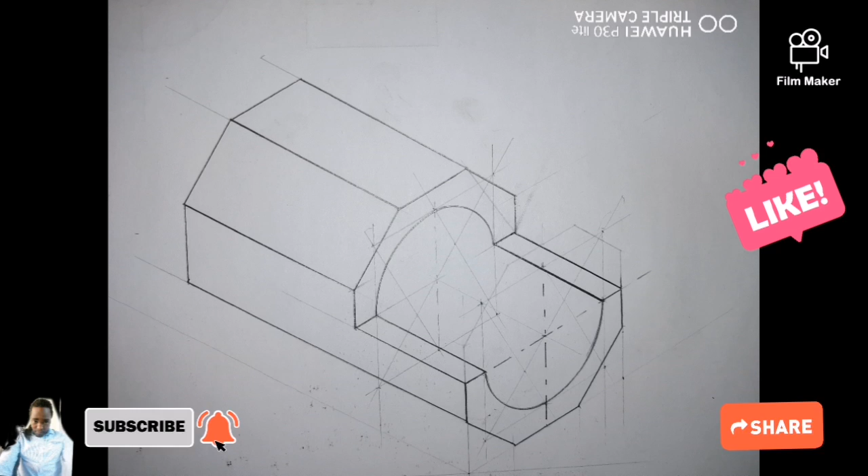Right, ladies and gentlemen, let's look at what we have now here. Isometric N2. So these two primary views are given in third angle orthographic projection, which means this one is your front view, this one is your right view.

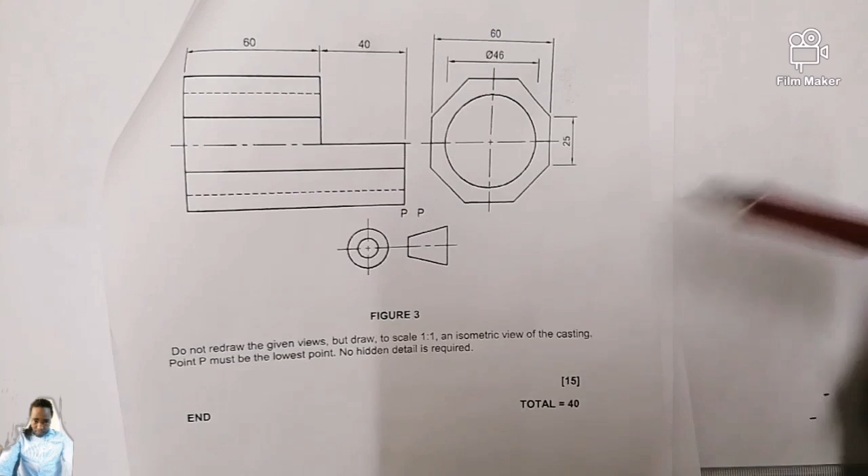Actually, they were supposed to be given in first angle orthographic projection, so that it will be well exposed. Even these hidden details, they were gonna be well exposed. You are going to see it clearly. But then let's answer the question according to the way as it is given. So we are not going to create our own question, you understand?

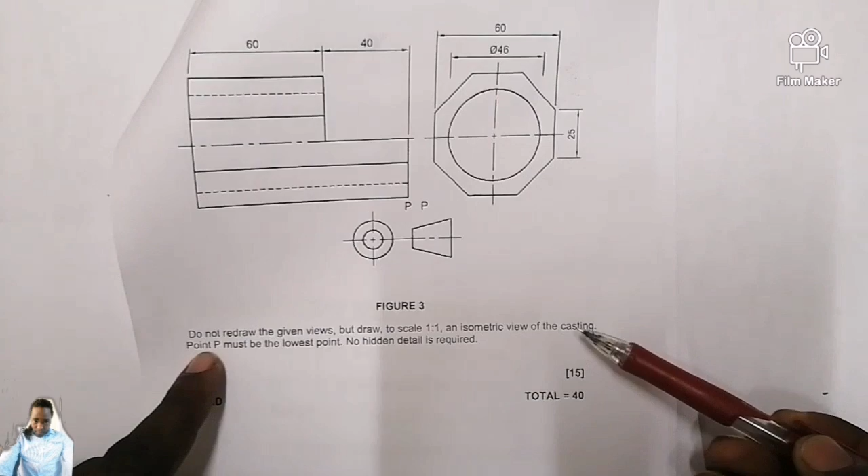So do not redraw the given views, but draw to a scale 1:1 an isometric view of this casting. Point P must be the lowest point, no hidden details is required. So let us start. So you remember that it is advisable to start bottom, a little bit center of your drawing sheet, because what you're about to draw, it will be going up.

So I'll start with a line out of dimension. This line from here till here, it's a center line, it's a faint line out of dimension. From there I will draw a perpendicular against it, you understand? So this point, I'll give it a name as point P, which is this P that they are talking about. So from there at point P, remember we use this set square, isn't it? 30-60 degrees anti-clock and clock.

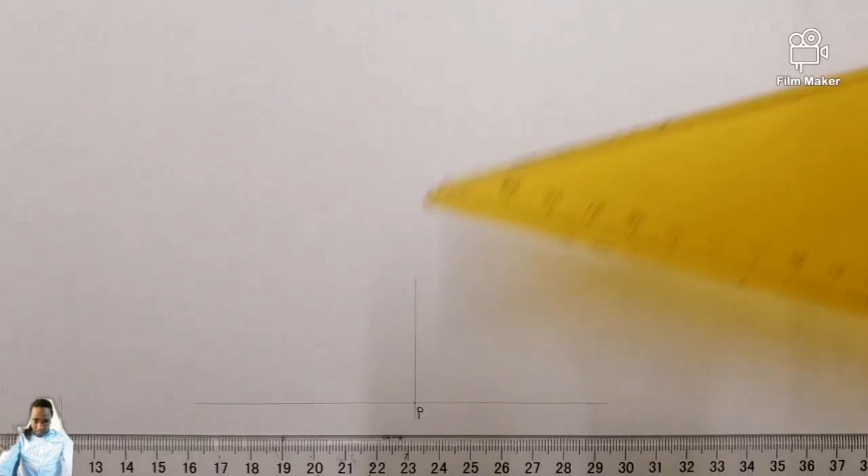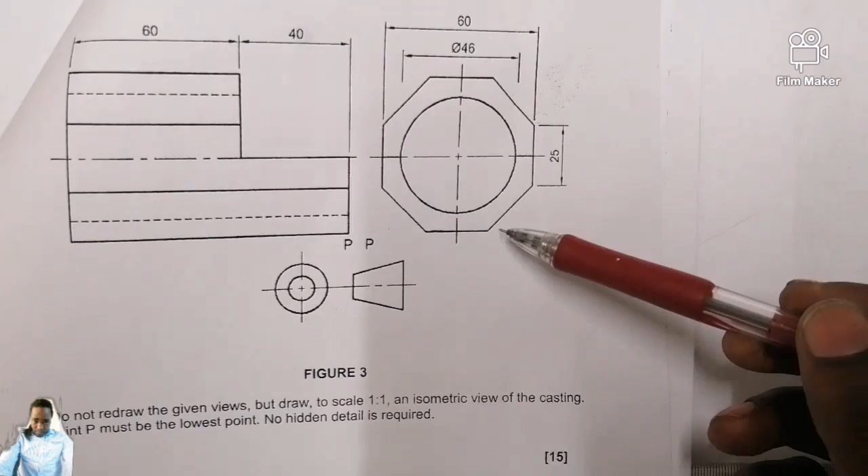So from point P, I am going to have a faint line at an angle of 30 anti-clockwise like this, and twist it this side again like this. Then from there I will firstly draw this hexagon. 1, 2, it's octagon, it's not hex, because hex means 6. So 1, 2, 3, 4, 5, 6, 7, 8 is an octagon. So I will firstly draw it aside so that I take proper dimension, you understand?

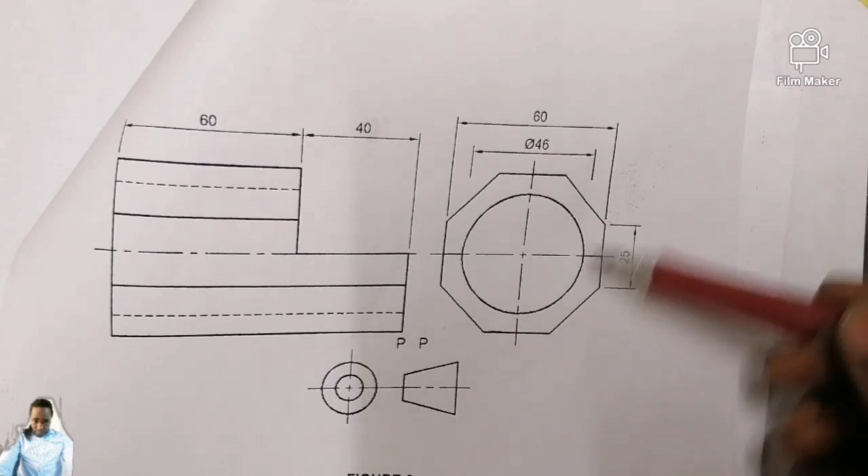So somewhere up right hand corner of my drawing sheet, I will draw this faint line out of dimension, isn't it? Then we are told that this octagon of ours is supposed to be 60 millimeter, and we're even given the diameter of it. So from here till here is 25 millimeter. So what do you do with that? So from this point, I'll put this angle out of dimension. Then I measure 25 millimeter. There is my 25. So I can erase here.

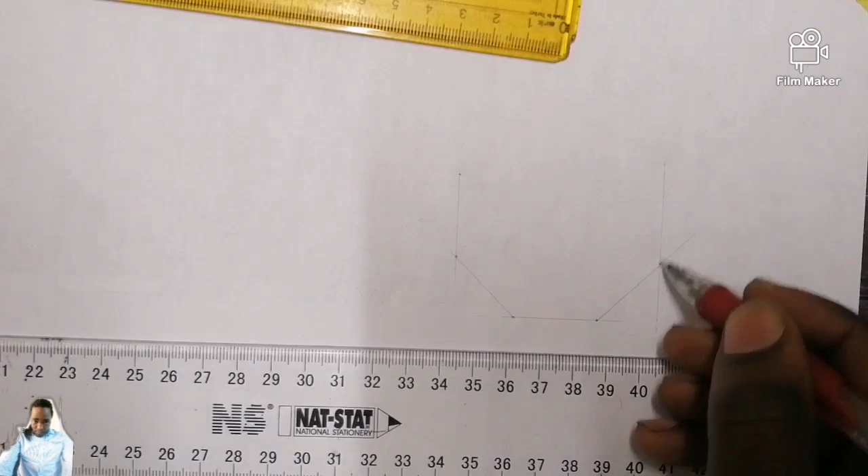And again from here till here, we know the properties of an octagon. All the sides, they must be equal. So there is my 25 millimeter. So which means I can erase here again. There you go. So we know this point and that one, they must be on the same horizontal line. So I can easily put my T-square like this. So from here till here is 25 millimeter. So I can now go up and again up, you understand? Then I measure my 25 millimeter again. There it is. So again from here going up your 25 millimeter again. There it is.

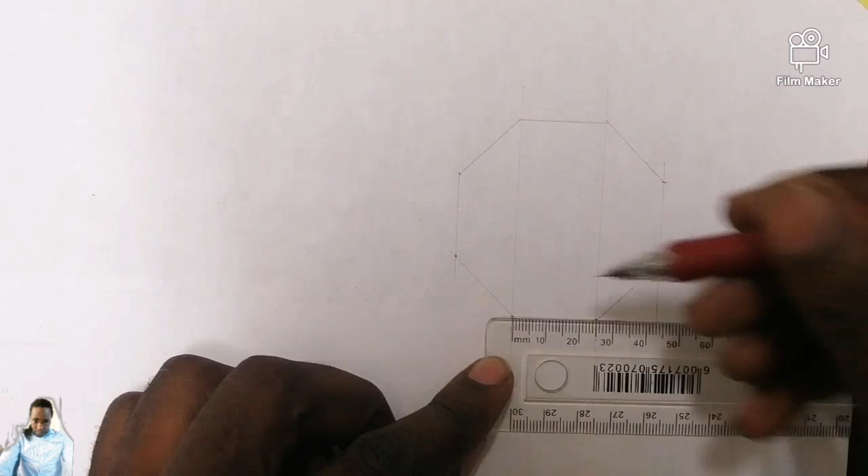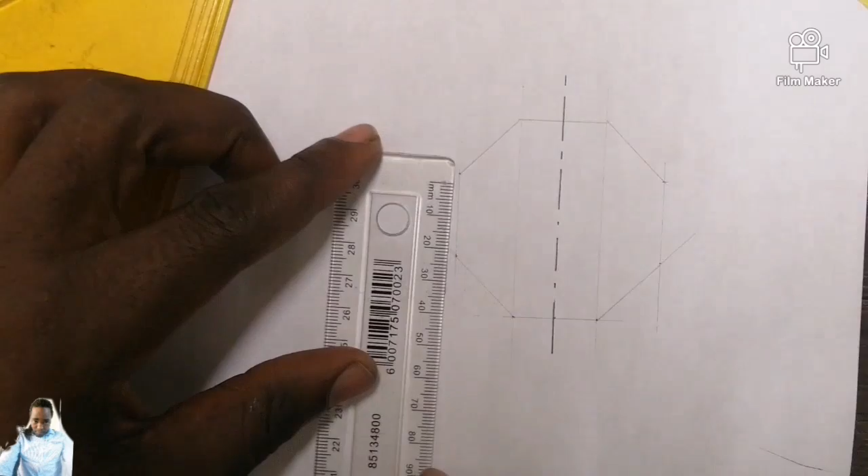Then after that, I'll take this one up, faint and faint, so that I have this one. There you go, and here you go. Gotten your octagon. You understand? So we've gotten our octagon. So let's get the center of it. So from here till here is 25, isn't it? So 25 divided by 2, it is 12.5. So 10, 11, 12.5 is between 12 and 13. You understand? So I'll have the center, then again this side, ten, 11, 12.5, between 12 millimeter and 13 millimeter. I can have my horizontal center line. So it is absolutely correct.

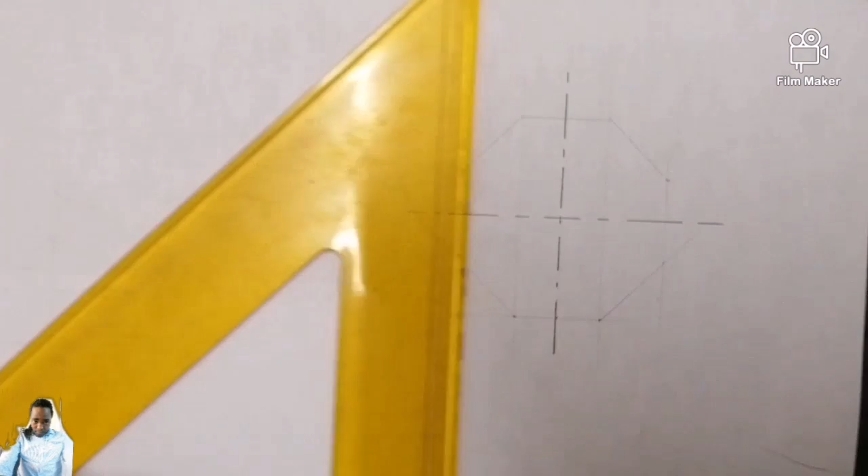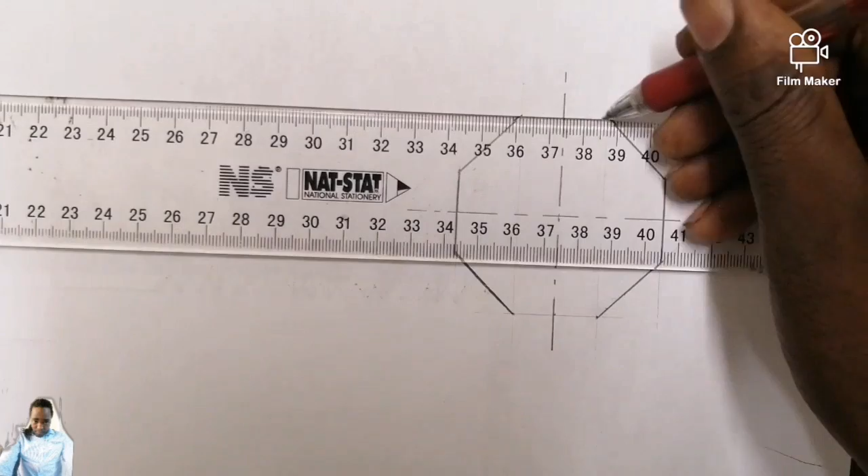You see that they told you from here till there is 60 millimeter. So let's confirm that there is your 60 millimeter, isn't it? There it's absolutely correct. So you can have it solid. Draw it solid now. This one is parallel to this one. This one parallel to this one. So that was the simplest method of drawing an octagon. The properties of the octagon, all the sides they must be equal and they must be at an angle of 45 degrees. Then from there till here, from there till here.

Right, so now we can go back to our P point. Take your drawing compass, put it from here till there, which is a half of 60, isn't it? It's 30. So I come and measure the 30 this side, because this is the right view. So I must have this side there is my 30 and 60 is right there. So where I have this one, I can put the vertical center line. There it is, just a little bit long. Then this one.

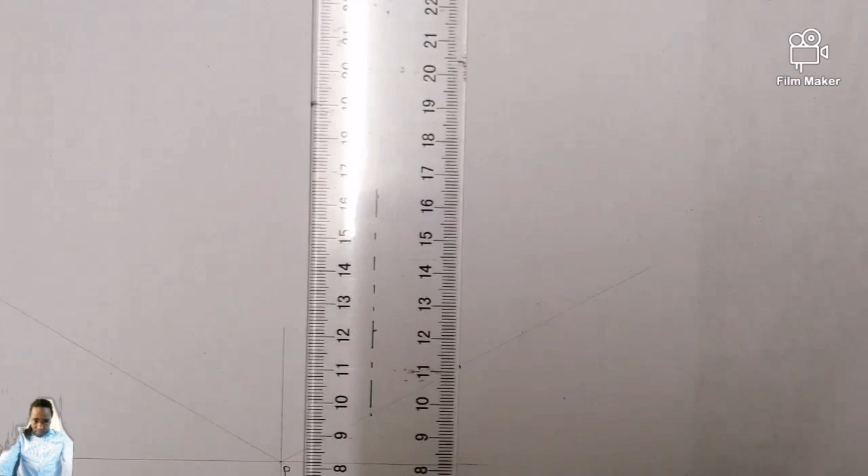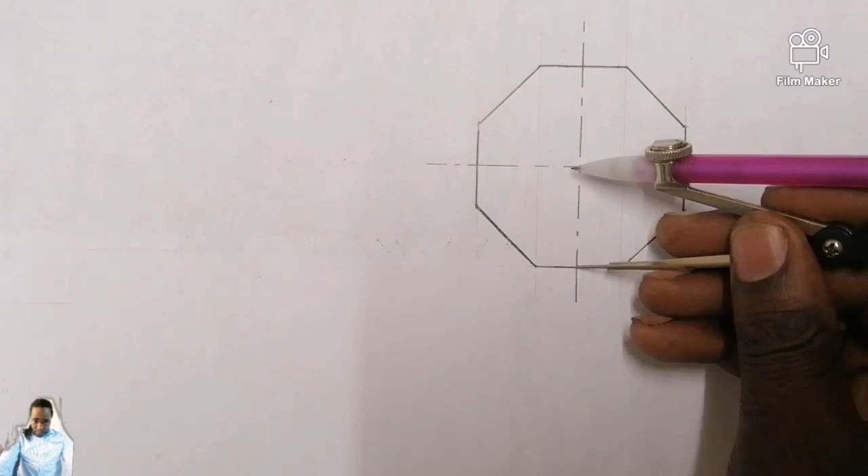So now let's see the height. Do we have the height? We do not have. That is why we had to draw the auxiliary of it. We had to draw this one. So place a drawing compass from here till the center. Actually, even if you place it from here to the center, it's still the same thing from here till there, or from here till here. Then after that, I come and place it here and give it a mark right there.

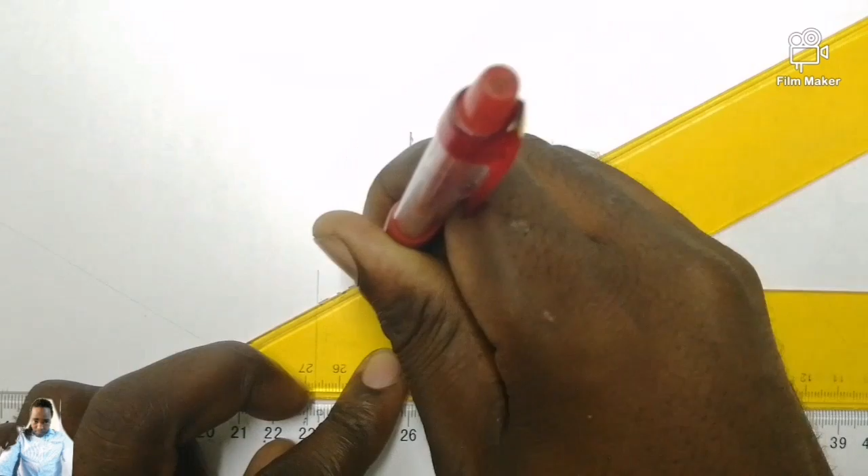So this one is going to give me the horizontal center line that is at an angle of 30 degrees, anti-clockwise, like this. Then after that, we are taking the dimension from your auxiliary. So I'll place my drawing compass here at the center till here, at this point. Accurate, this is it. Now I place it here at this point. I mark here and I mark there.

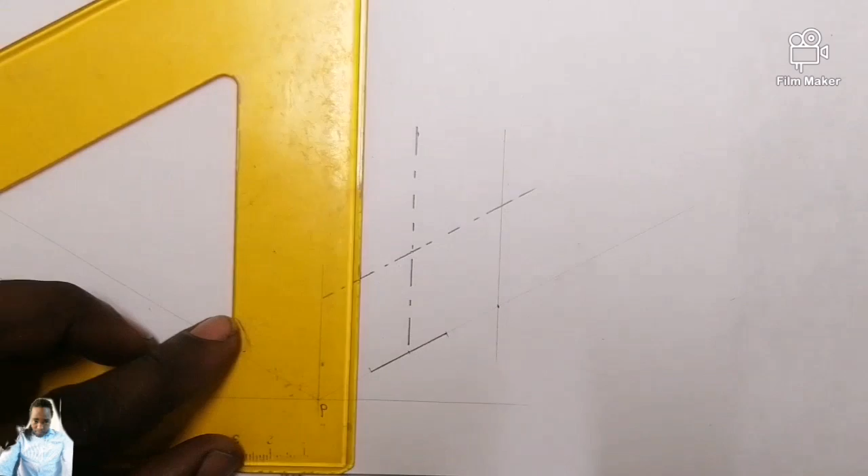You understand? So now I will have this one solid from here till right here. You understand? So now I can project these points up, faint, up and up. So what I did here, I can also do it there. So I mark here and I mark there, I mark here and I mark there.

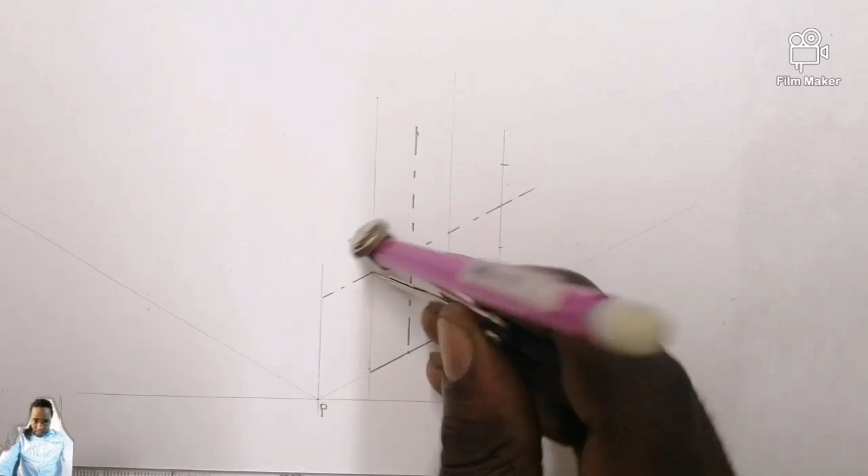Even if you just mark it once, because you just do like this, isn't it? They're supposed to be on the same line, but what you did here is supposed to be actually at this. So I'll further extend it just a little bit. Then from there it is supposed to be actually here and there, not on this one. Erase it. So now, without fear or favor, I can have this one solid from here till there. I can draw it solid now, and again this side from here till there I can draw it dark.

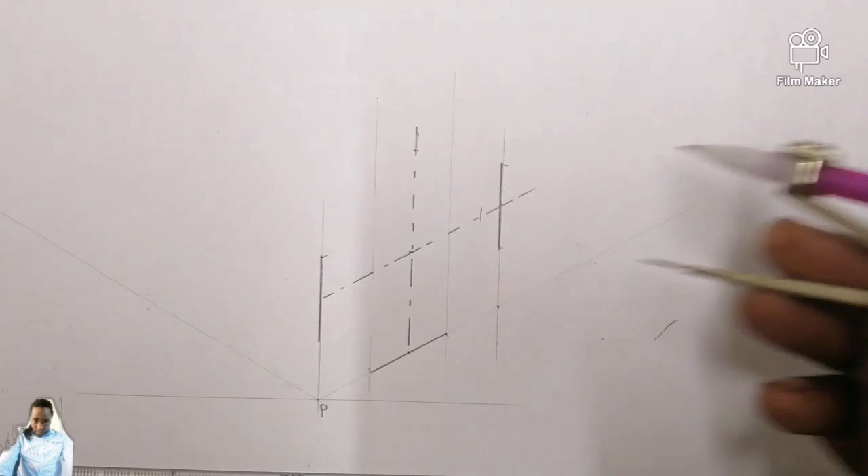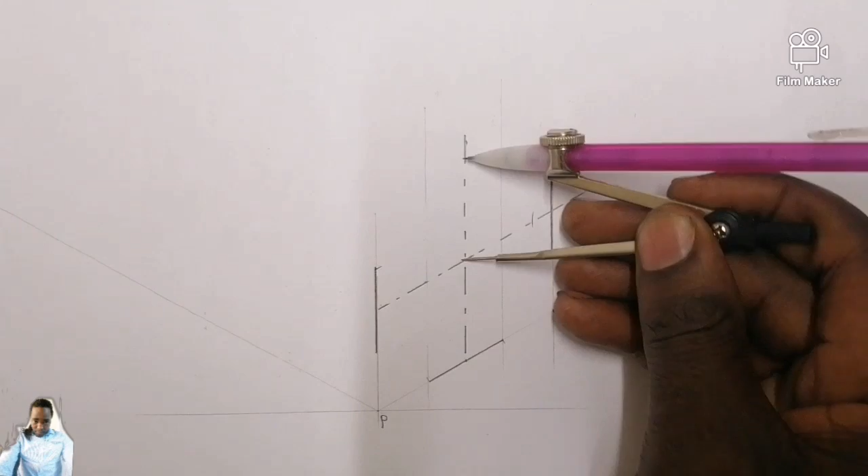You understand? So now let's get the height. This distance from here to your center is supposed to be the same, since here at your auxiliary, from here till there is the same as from here till there. You understand? So even here, from here till there, it's supposed to be the same. So now I'll have it solid at an angle of 30 anti-clockwise. There you go, dark like this. See? Then you can take your 30cm ruler and join this point with that one.

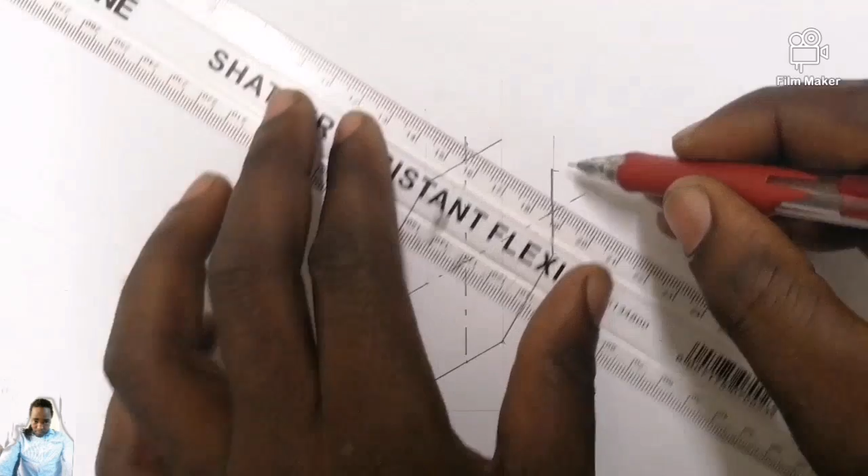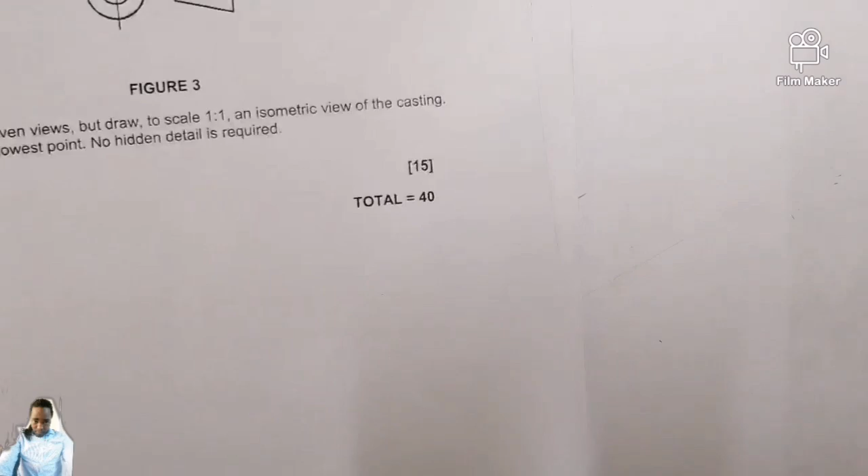There you go, and like this you go. Like this you can go. So I don't understand why they said we must expose the back view, because this is the back view actually. So it's this one, then from there I'll erase this one. It was supposed to be drawn faint. So just erase it a little bit.

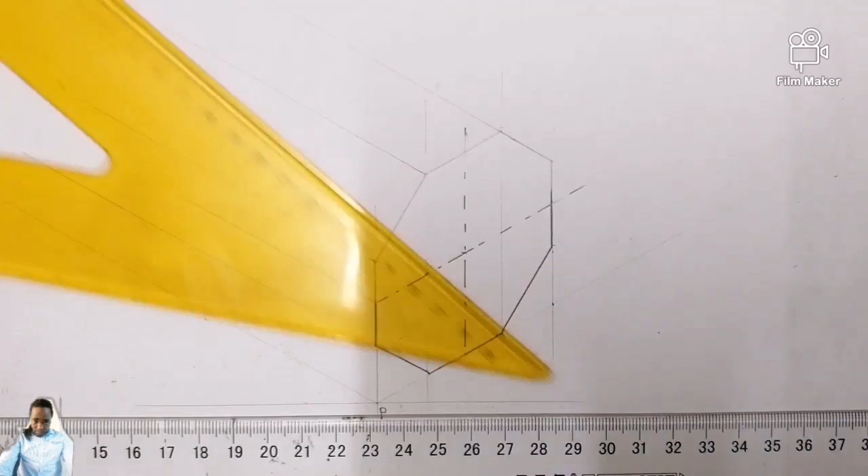So now what I can do, I'll take this point in this direction, this one and this one. You understand? So what's supposed to remain solid here is from here to right there. So I'll take this point as well as this one and this one and this one at this angle. I've just spoiled my work now. So I'll start with this one. There it goes. Take this one, it will help you there. There it goes. There it goes.

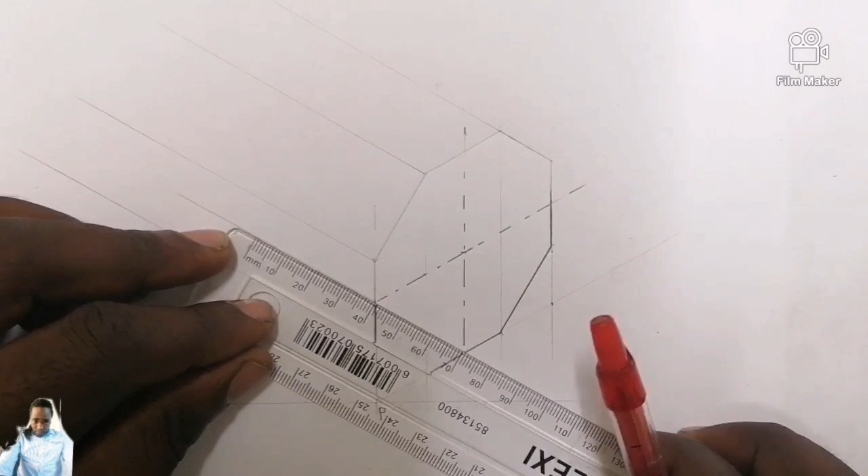Then now let's look at the length of it. The length, from here till here, is 40mm. So I'll draw it from here till there. There is your 40mm. And then it will be going up like this, vertically up, which is this one from here till here. At your right view it is this one from here till there.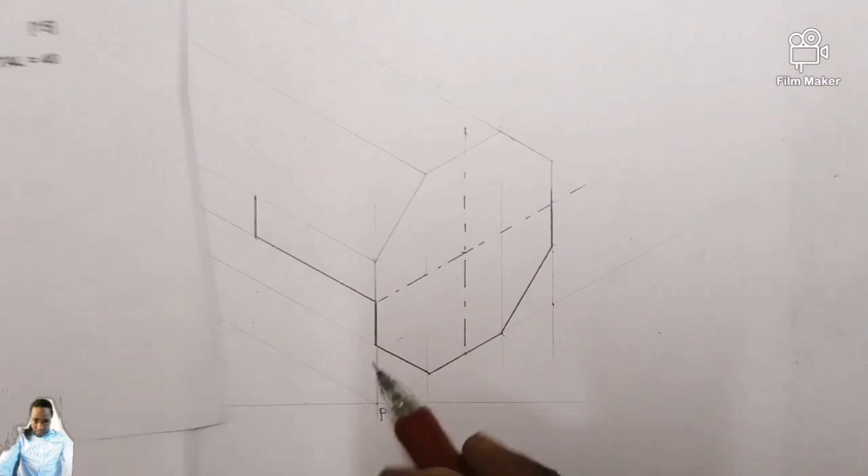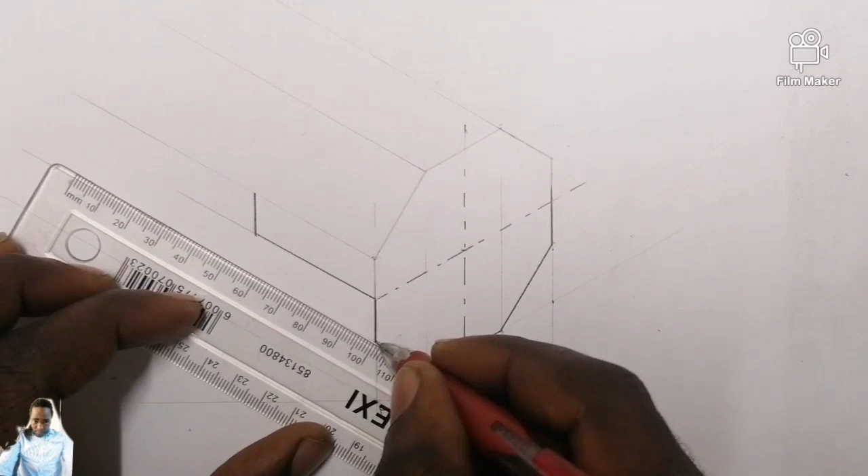So whereas we do not have a dark line from here till here, which means again from there till there we do not have to draw it dark. You understand? Whereas this one from there till there will further continue. So where your 40 ends, begin 60. You understand? So from there till there is 40 plus 60. So the 40 plus 60, I can record it right from here, which is 100 millimeter. So from here till there, 100 millimeter.

Then once I've got my 100 millimeter, I'm going to go vertically up, which is this one, from here to there, 100 millimeter. Then from there, let's look at what is going to happen now. So we are going to get a line that's going to be parallel to this one. So how? As much as we can see, it is dark from here till there, which means this one from here till there I am going to draw dark.

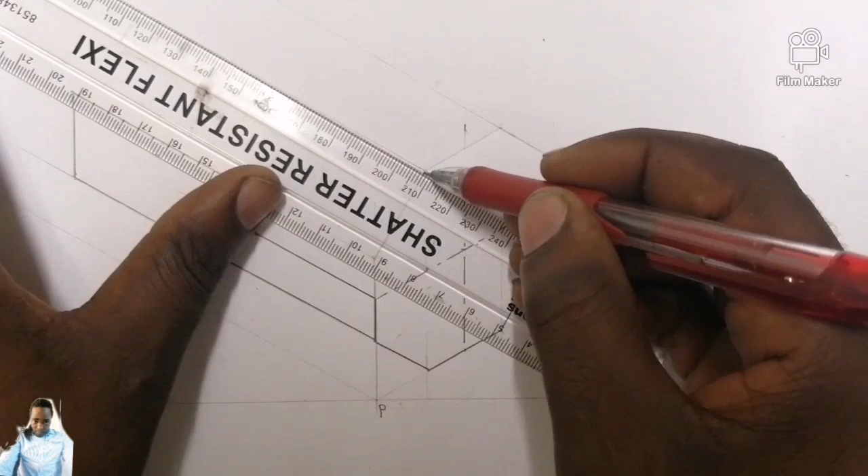There it is. Then now let me extend this one just a little bit. There it goes. So the same 100 millimeter that I did here, from here till there, I will do it here now. And I do not draw, I mark, so that now I join this one with that one solid, you understand. Then from there, extend this one just a little bit again. There you go, so that I can have it close to dark right there.

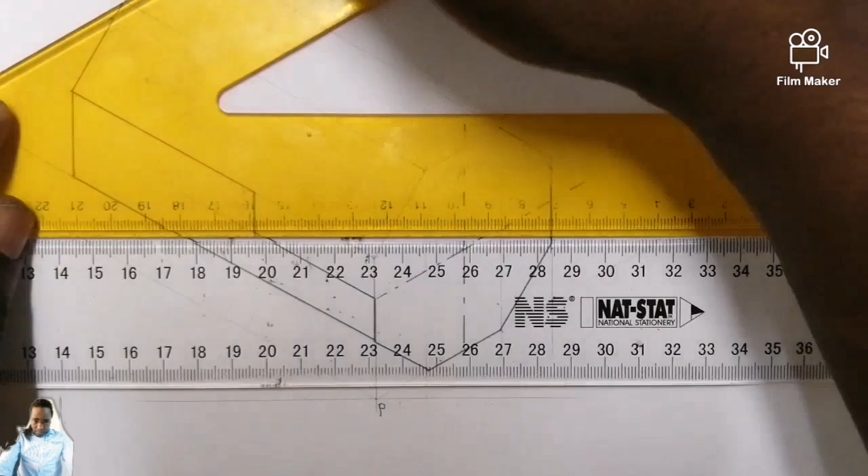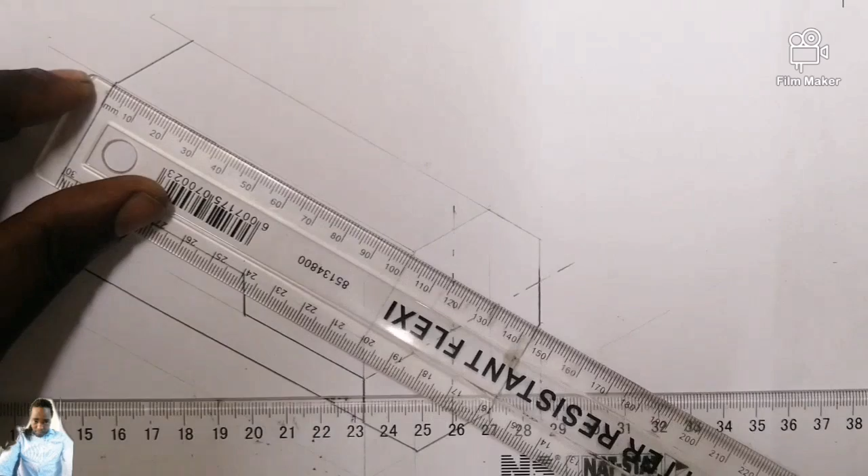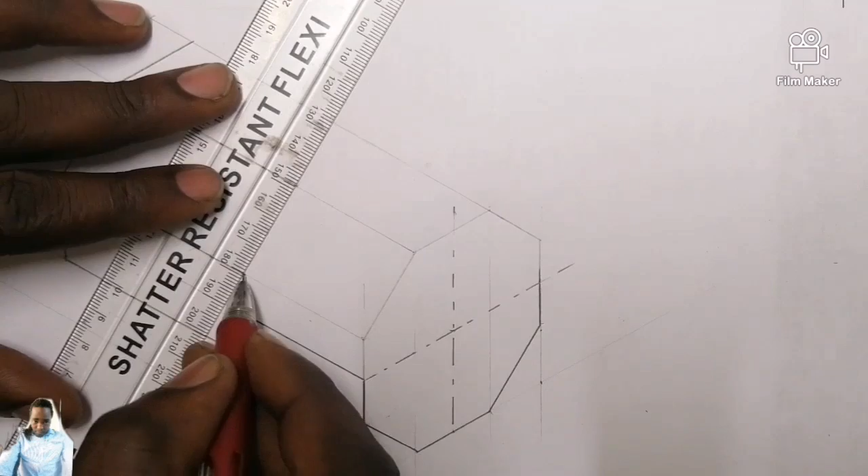Then the 60 millimeter, so now I can measure from there till the 60 millimeter, which is this one. From here, our 60 millimeter is ending right there. Have it dark. Then now I can join using my 30 degree set square. It's actually parallel to this one, parallel to this one. Then from there I can have it dark here as well. Then now have it dark like this.

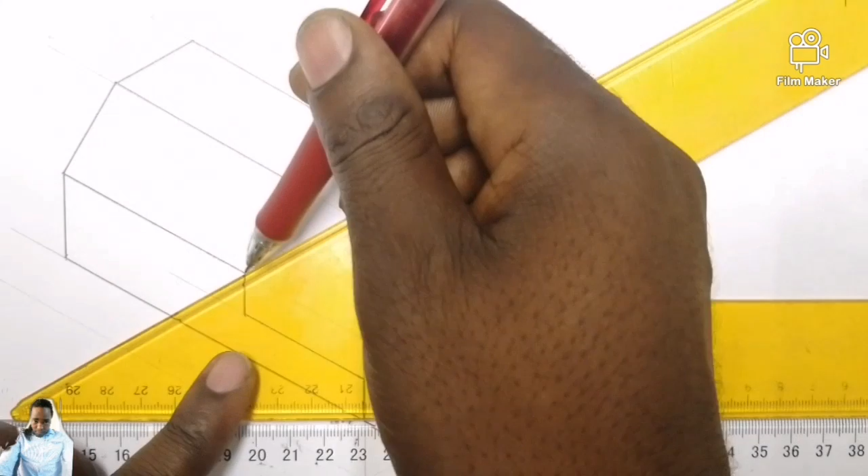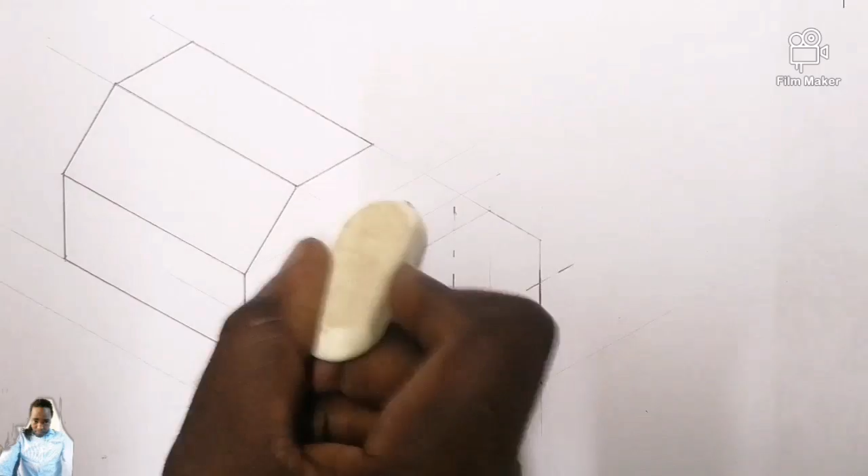Alright, so what is going to happen, I will take this point, faint, I take this one, faint as well. So let me try to erase these ones so that they don't confuse me. Erase them. In this one now I can erase it, they don't help me anymore. What I drew dark at first, it was not supposed to be dark, because a dark line you can't easily erase, you understand, but I've spoiled my own work now. Okay.

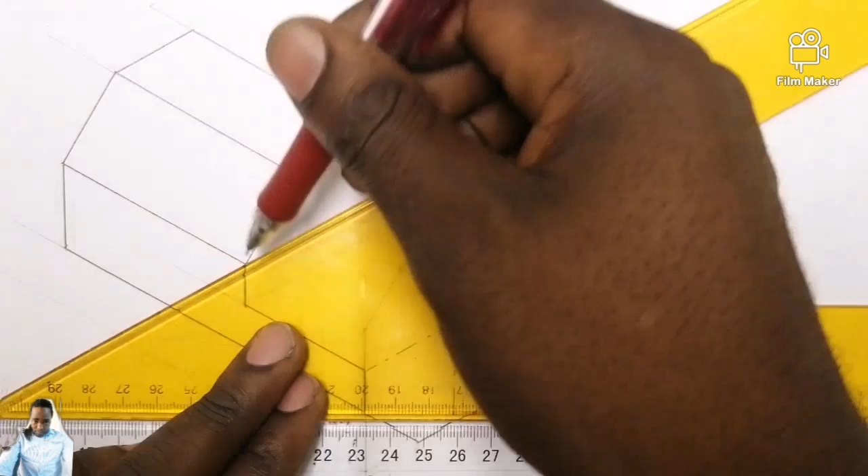So now we are going to have a thickness, because we must get a certain thickness that's going to be like this, or somewhere there. So after I've taken this one, there it goes. So we are having a diameter of 46. So what do you do about it? This diameter 46 divided by 2, so that you get radius, is going to be 23, isn't it? You open your drawing compass to 23 millimeter. So there is my 24, 23 is this one.

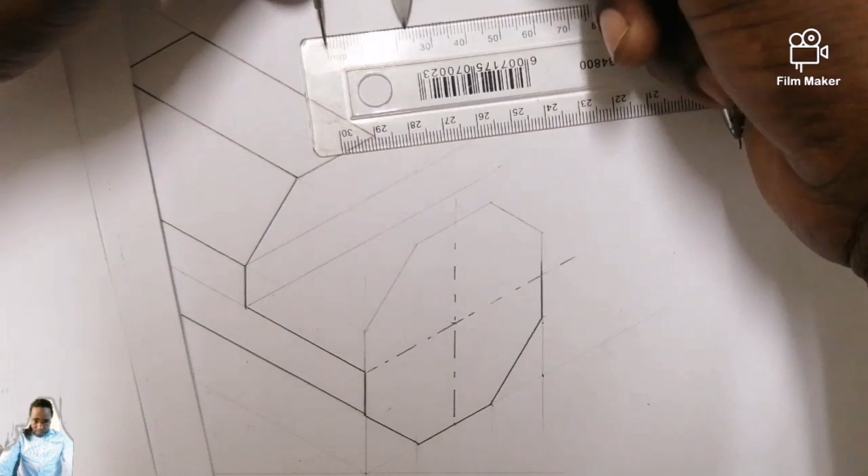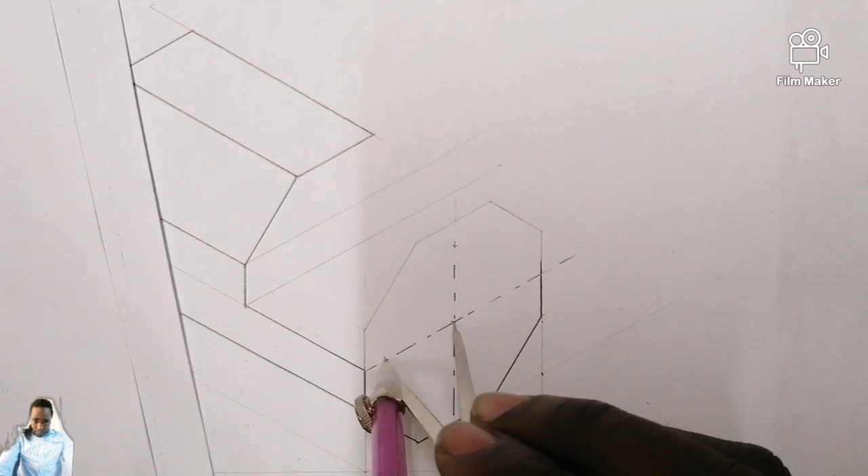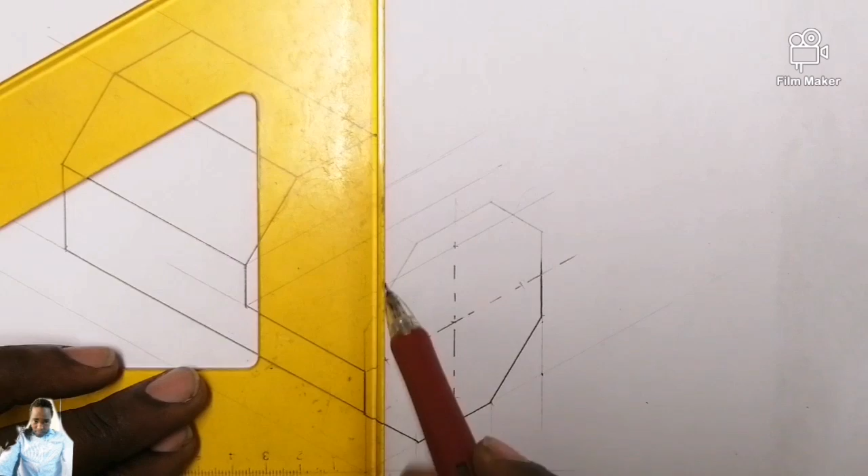So I'll come here at this center, I mark here 23, 23, I mark 23, so that from here till here is 46, isn't it? Confirm that. Yes. So after you're done with that one, we are going to create a square. Have a faint line like this, have another one like this, get an exact point here.

Guys, I'm exhausted, I'm very tired, just forcing myself here, I'm very exhausted.

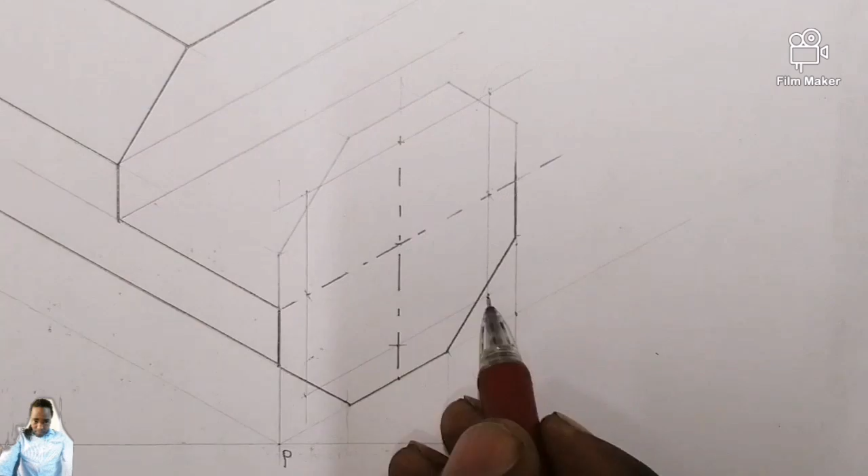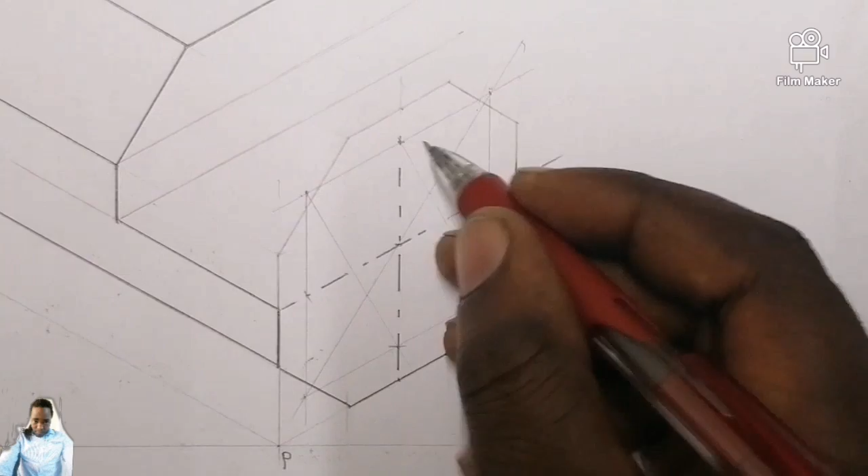From here till there. So faint. There you go. So after joining the 2 longest opposite corners, I'll join corner to center, center to corner. These 2 lines must be parallel to each other. So there you go, faint, and center to the corner. There you go, faint. So now I'll place my drawing compass here to get this arc, and here to get this arc, but this one we are not looking for. So place the drawing compass here, further extend it till here, and then get an arc that's going to be like this. There you go. Understand? So draw it dark.

Then now, to get this one, place my drawing compass here, further extend it till here, then you get that arc. Place it. Here you go. Till there, then I can draw it dark.

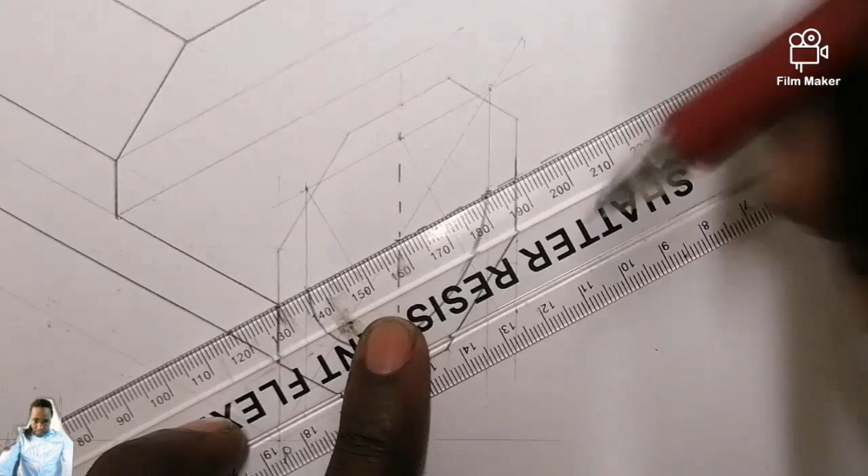There you go. Draw it dark. There you go. Right, so now I can have this one solid now. From here till there, can have it solid, and again from here till there, have it solid. Like this. Then I can have this one straight away solid now. From here till right there, solid.

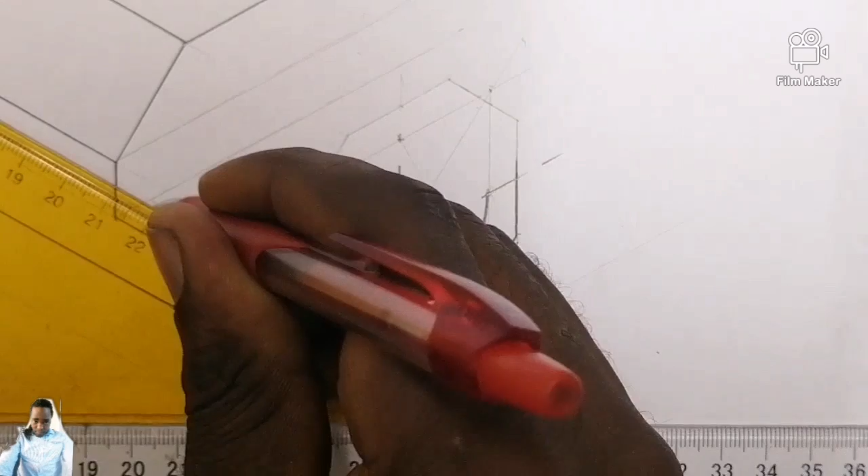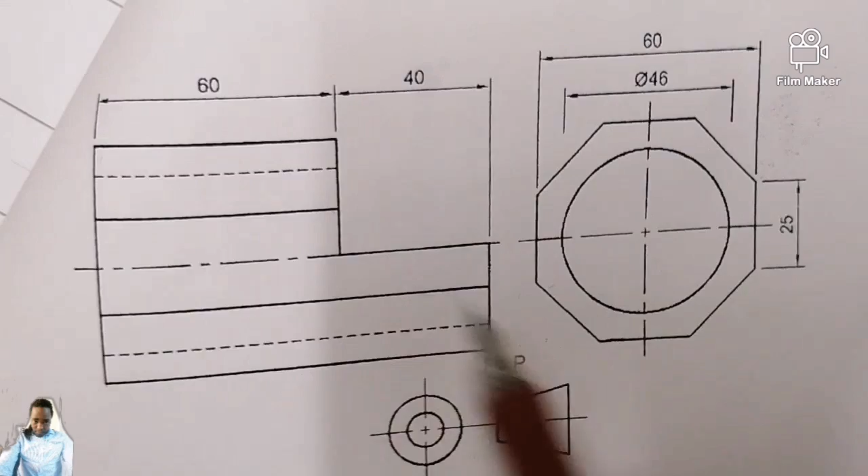And I'll have this one again solid. Because we are told this hole is going through your front view, isn't it? It's not stopping here. You understand? Okay. So again here at this angle, I'll have this one till that line dark, and again from here till right there dark.

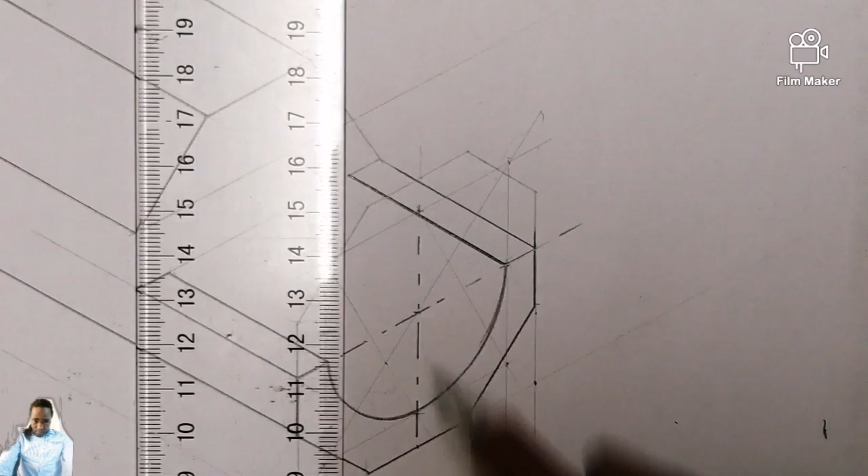So now again from here till there, you understand? So this one is going like this, which means it's going to go up till right there. Then from there I can have it dark like this, and dark from here till right there, and dark from here till right there.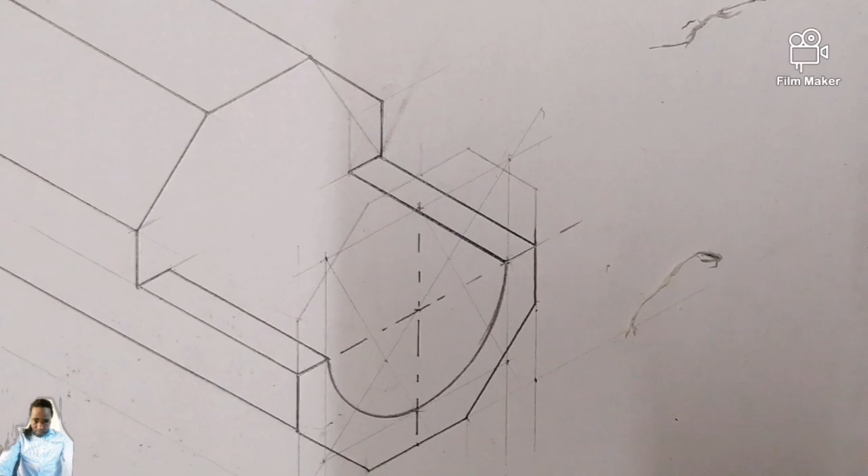Yes, so now we drew the bottom half, isn't it? So the upper part that was supposed to be somewhere here should now be exposed there. You understand? So erase this one before it confuses you on what you're about to draw here. So now I'll take the center towards this surface. So faint, there it goes.

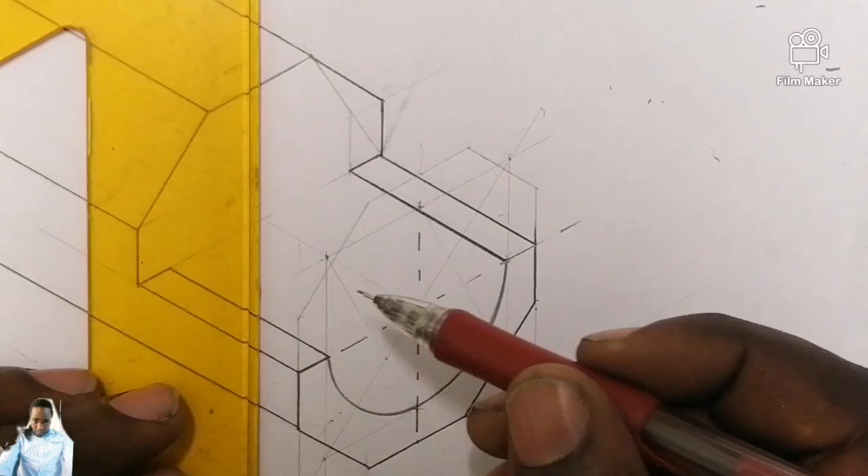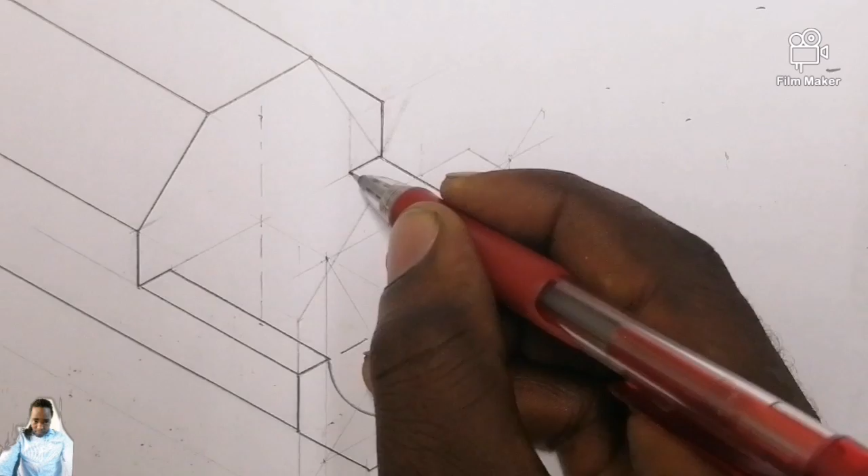So at this surface. So now erase this one here, so I can go up now, which is this one, isn't it? So now I'll transpose this point at that center. So there it is, and this one, where it is now, is right there. Then this one is already there, this one is already there.

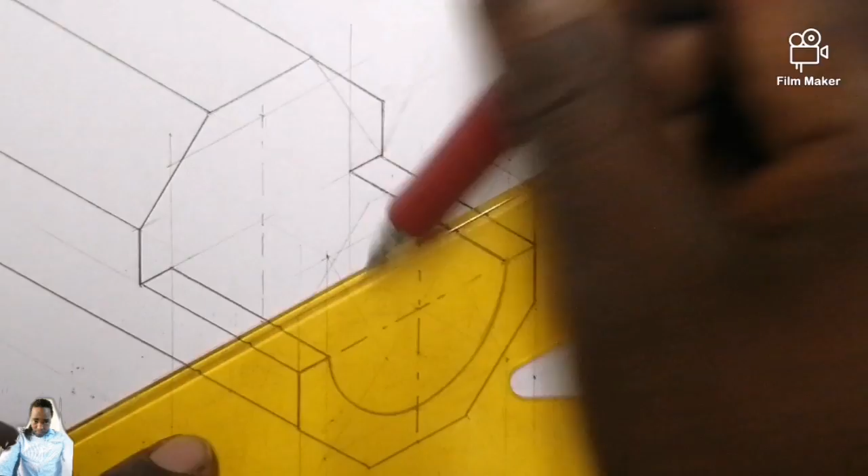So now here you go, like this you go, like this you go, like that you go. So I've got a corner here, corner there, corner there, corner there. So what we did here, we are now doing it at the back there. You understand? So now join the two longest opposite corners, which is this one, from here till there.

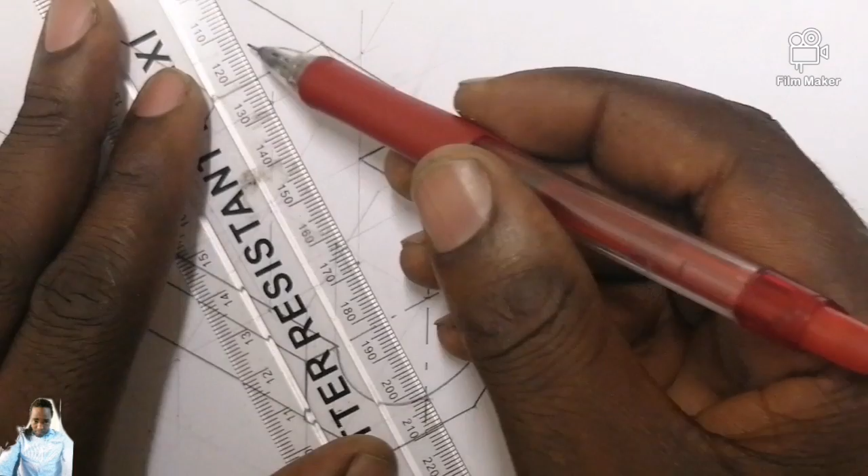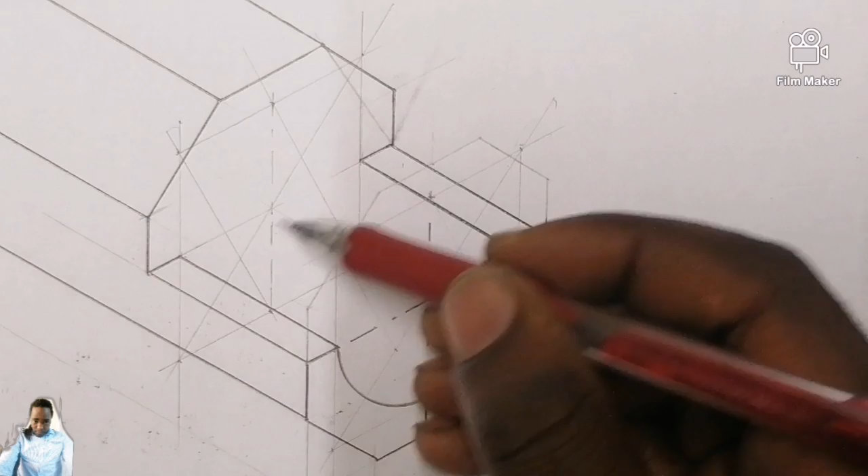Today I'm not teaching, I am just showing. So corner to center, center to corner. So there you go, and there you go. So this one, we are not looking for it. It's going to appear as hidden, which is this one. We've done it. So again, this one from here till there, we've done it. We are looking for this one from here till there, and from here till there.

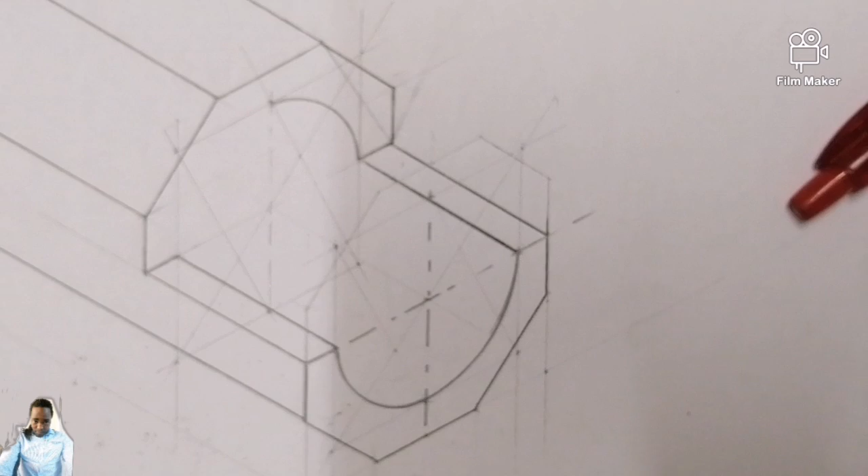So let's get it. We are going to place a drawing compass here, open it till there, then there you go. So place it here, from here till there, draw it dark. Then now to close it this side from here till there, we must get an arc that will start from here till here, that is opposite to this one. Remember how to do this arc.

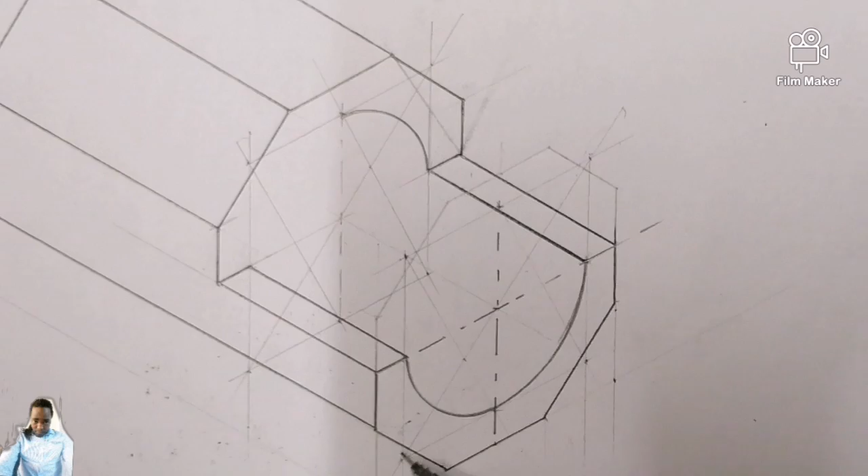We place our compass from here till there, because this is the square. You remember, it's corner, corner, corner, corner. It's 4, isn't it? So same applies to this one, corner, corner, corner, corner. So we're going to place the drawing compass at this corner, not this one. Remember, this one is for this one. So from here till there, then you get an arc. So it has to start here and end there, or start here and end here.

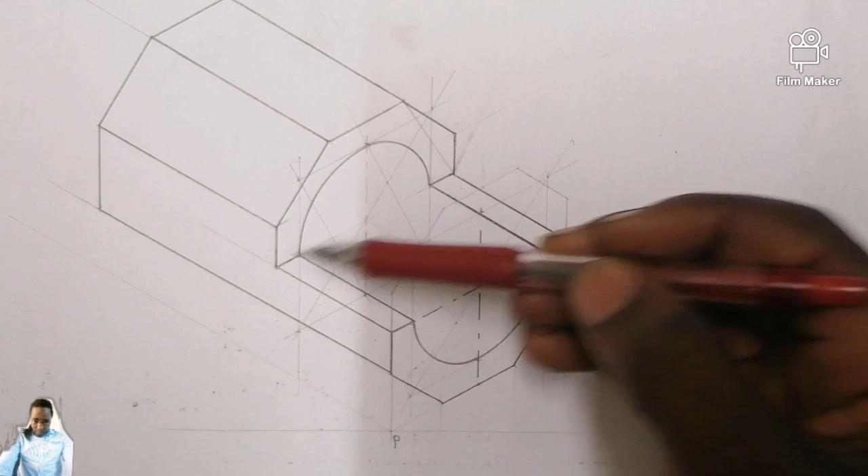Which means we're not supposed to draw it dark here, but then it's okay. Again here, you see we were going out because we forgot that it's going up. You understand? So this is supposed to even appear there. This one is, which one is this one?

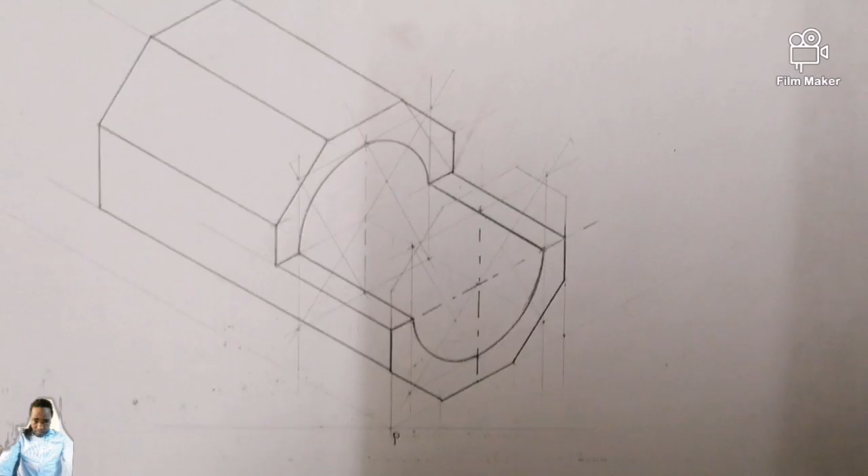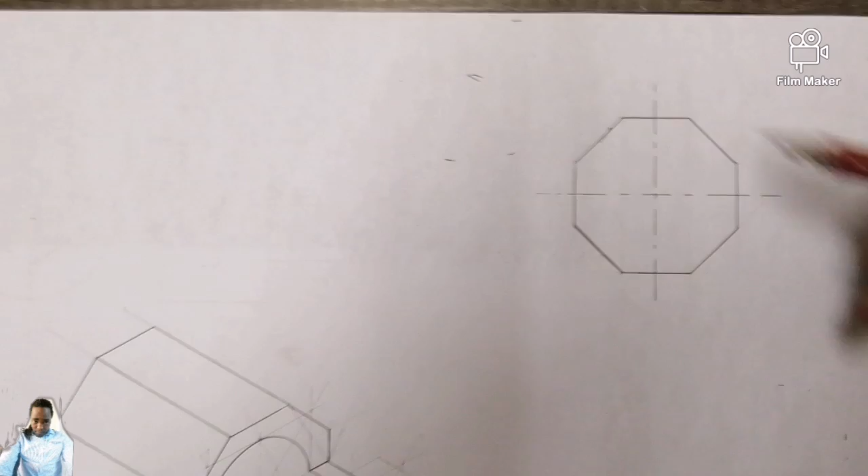So that was it. To some of you guys, this was very simple, straightforward. You cannot get this without the auxiliary, so you have to get the auxiliary, understand, so that you take proper dimensions. For instance, we don't know the height from here till here, the length of your octagon, you don't know it. So if you draw it, it becomes simple for you to get it. You see the point P, get it, you understand.

If you take a closer look, if I can explain a bit, even though I'm direct. So the point P, look at it very well there by your right view, is somewhere there, isn't it, which is what is happening here, you understand. So that's how it's supposed to come.